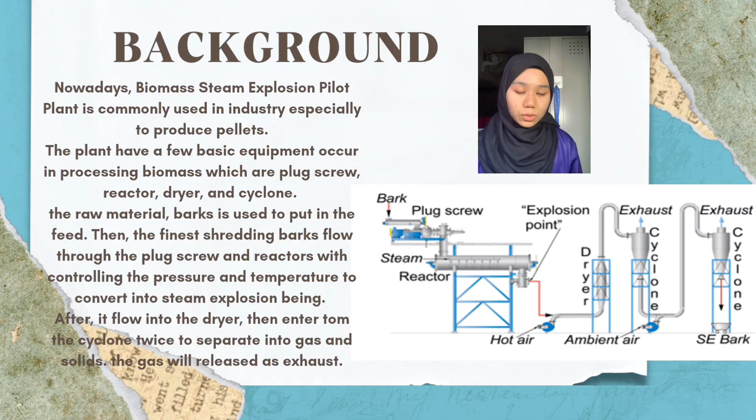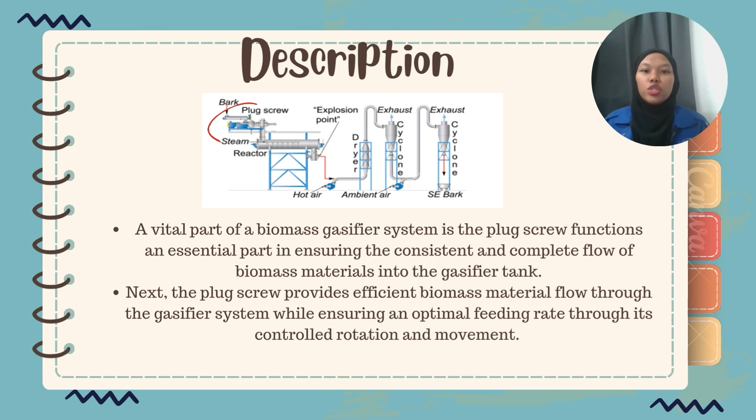Next, for scenario 1: plug screw failure leading to less biomass to the gasifier. A vital part of a biomass gasifier system is the plug screw, which functions to ensure the consistent and complete flow of biomass material into the gasifier tank. The plug screw provides efficient biomass material flow through the gasifier system while ensuring an optimal feeding rate through its controlled rotation and movement.

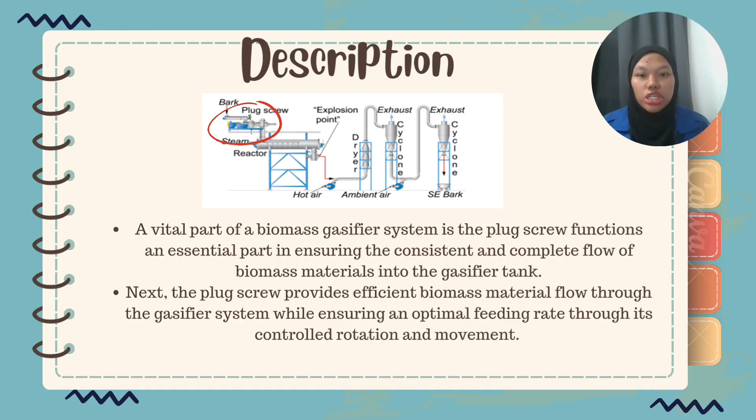To find the roots of the problem, we are using the 5 Whys analysis. The problem statement is: plug screw failure leading to less biomass to the gasifier. So why did the plug screw fail? Because the plug screw splintered due to high friction.

Then why was there high friction? Because the screw mechanism was not properly lubricated. Then why was there insufficient lubrication? Because the maintenance schedule lacked regular checks for lubrication requirements.

Then why was the maintenance schedule lacking? Because the maintenance protocol did not specify a detailed checklist for lubrication intervals and quantities. Then why was the maintenance protocol inadequate? Because the initial equipment manual provided only limited guidance on a thorough maintenance schedule and specific lubrication requirements.

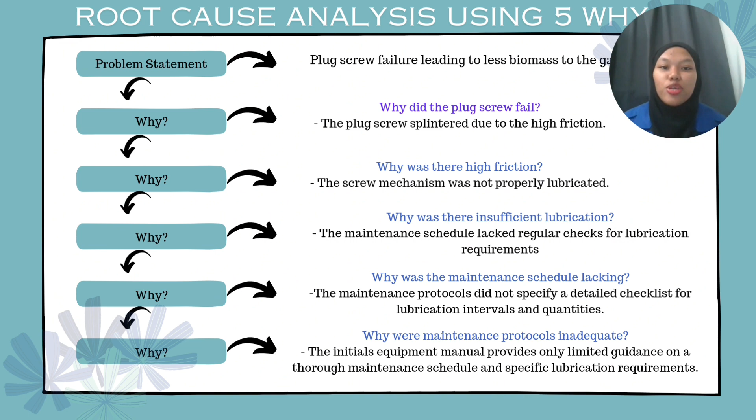So that's all for my part.

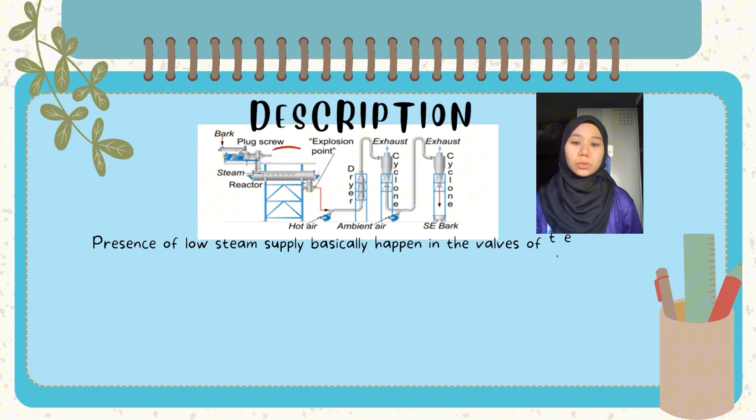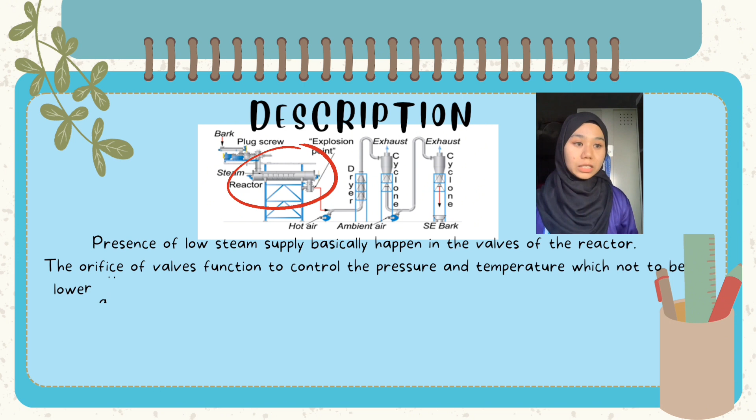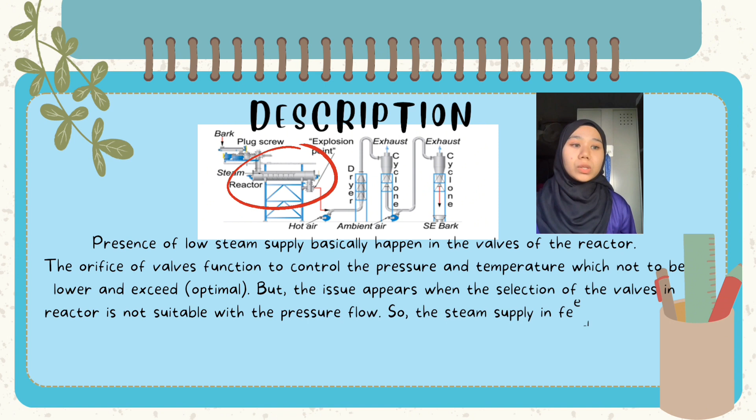For scenario 2: low steam supply leads to low conversion. The presence of low steam supply basically happens in the valve in the reactor. The orifice of the valve functions to control the pressure and temperature so it is not too low or exceeded, meaning it should be controlled optimally. But the issue appears when the selection of the reactor valve is not suitable for the pressure flow, so the steam supply in the feed reduces and leads to producing low conversion of product.

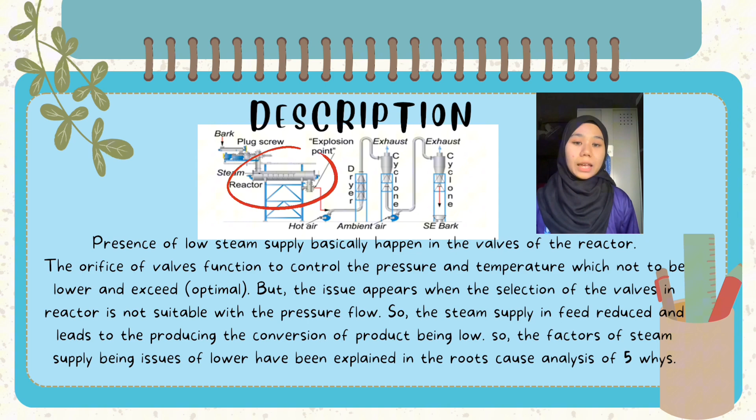The factors causing the steam supply issue have been explained in the root cause analysis of 5 Whys. Hi, Assalamualaikum, my name is Nurhusina, my number is KH20032.

I will continue the presentation. This figure shows the root cause analysis 5 Whys for scenario 2. Firstly, why was there a low steam supply?

It's because of the pressure drop. The decrease in pressure drop made the capacity of the steam supply also decrease.

Secondly, why are there pressure drops? It's because of continuous leakage from the valve. The steam leakage from the valve made the pressure low and lessened the quantity of steam going through the pipe. Third, why is there leakage from the valve?

It's because the seal of the valve is worn out. This valve deteriorates over time. Then fourth, why is it worn out? As the steam supply process requires high temperature, the valve exposed to this high temperature caused the seals to wear out.

And even more, if the material of the seals was not selected correctly and the design choices were wrong, not suitable for the steam flow. Lastly, why is there a faulty design? Due to improper selection of material, which resulted in inadequate control, it reduced the steam supply efficiency and made the valve wear out in a short time.

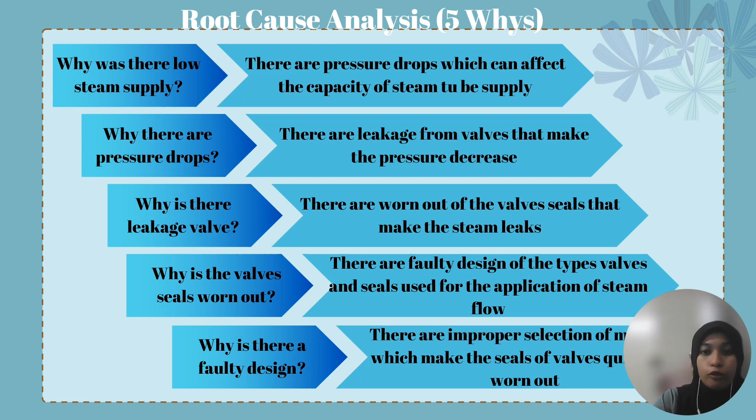That's all for me. I will continue with the next presenter.

Assalamualaikum, my name is Itina Ismaramati Hamidi, my matric number KH20039. Today I will present scenario 3, which is the clog of the first cyclone exhaust outlet. For the description of the scenario, first we need to know the function of the cyclone itself, which is to use centrifugal force to separate particles.

In the first cyclone, the separation of moist gas from solid material occurs, and then it goes to the second cyclone, which undergoes solid and gas separation, and the cyclone operates under low pressure and cyclonic rotation.

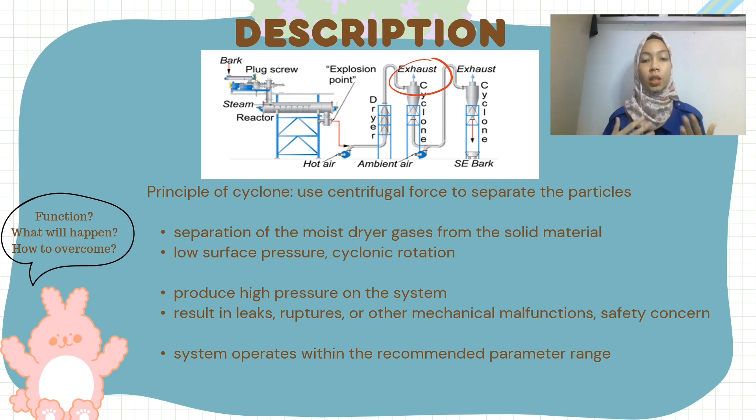So when the first cyclone exhaust is clogged, it will produce high pressure in the system, resulting in leaks, rupture, and other mechanical malfunction. At the same time, it will trigger safety concerns. To overcome this problem, the system needs to operate within the recommended parameter range when designing the cyclone itself.

We continue with the 5 Whys analysis. First, why is the first cyclone clogged? Because residue from biomass has accumulated. Why does biomass residue accumulate at the outlet? Because biomass particles are not effectively separated by the cyclone filter.

Why are biomass particles not effectively separated by the cyclone filter? Because the mesh size is not appropriate for the biomass particle size created. Why is the mesh size inappropriate? Because the difference in biomass particle size was not taken into consideration, and the mesh size was determined using theoretical calculation.

Why was the difference in biomass particle size not taken into account in the calculation? Because the calculation was made using an average particle size, which did not account for the range of sizes produced by the biomass material through the steam explosion process.

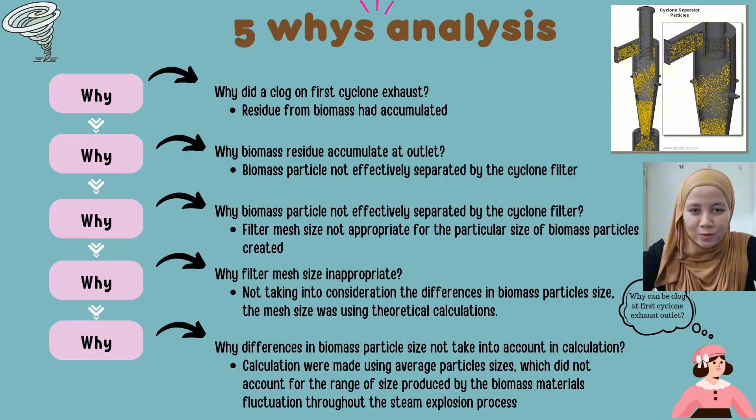That's all from me. So for the conclusion of this project, there are three main issues that contribute to problems in the biomass steam explosion system: the first is plug screw failure in the gasification system, caused by structural damage, lack of maintenance, and irregular lubrication.

The second is a steam supply issue that occurs due to pressure drop, valve leakage, malfunctioning valve, and faulty design. The last one is the cyclone exhaust outlet clogging due to biomass residue, which can cause incomplete cycle and produce ash and dust accumulation.

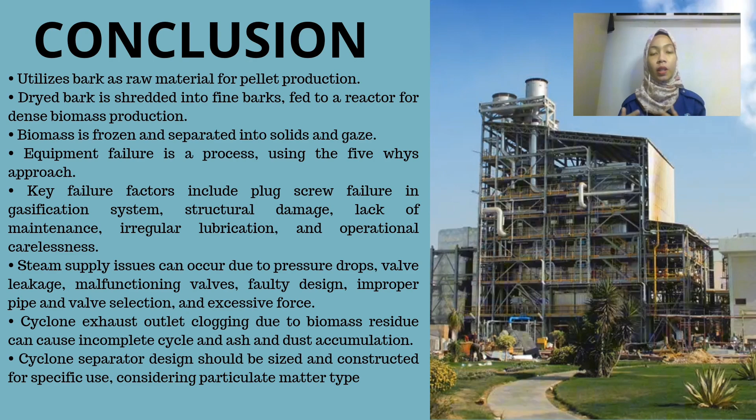So from this scenario, we can conclude that we can use 5 Whys analysis to determine the root cause and factors that contribute to the failure, and at the same time improve the effectiveness of the process. So that's all from us. Thank you.